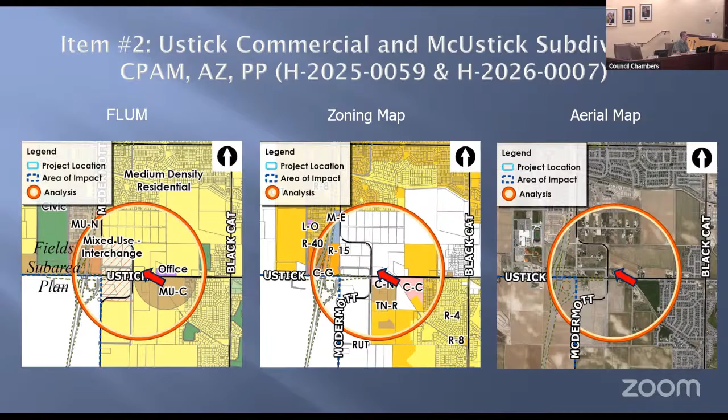So the first application I'll spend some time on is the comp plan amendment. The reason I want to spend the most time on this is, as you probably are aware, staff is recommending denial of this particular application. The applicant is proposing to change these 4 acres from MDR to commercial.

As part of the application submittal, the applicant did provide written justification as to why they felt commercial made more sense on this particular site. I'll get into their justification in a bit in my presentation.

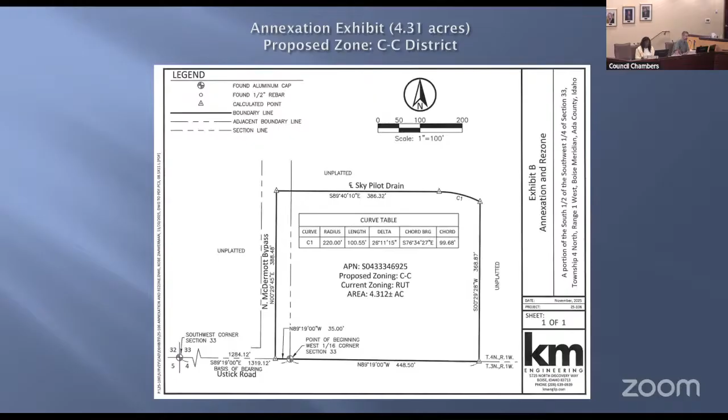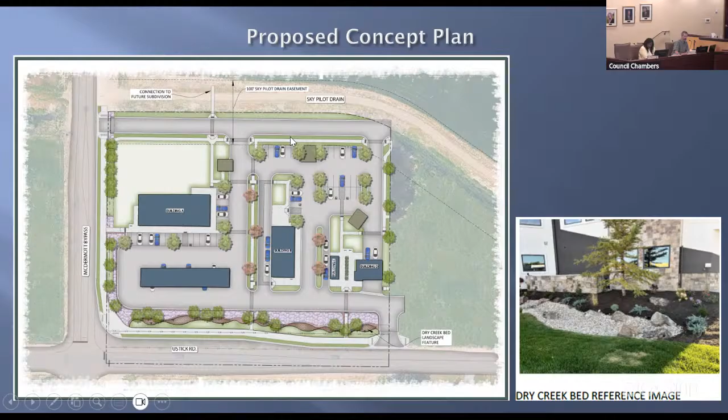There is also potential for a stub street to the property to the north. The applicant has provided a pedestrian connection, but given the width of the Sky Pilot drain, staff is unclear how that will provide adequate transition to the adjacent subdivision. We don't believe these uses are compatible with the adjacent subdivision or future development.

Based on ACHD and city policies, ACHD does not support the right-in, right-out access, nor does our city policy allow for that access point. ACHD did state they are open to the McDermott Bypass access since it's a lesser classified roadway than Ustick. This will potentially be designated a future collector, while Ustick is an arterial. So if and when ACHD takes jurisdiction and the applicant is successful with their project, they would have to work with ACHD in the future, as ITD has currently said no to that access.

With development of the property, the applicant will be required to put in landscape buffers along both Ustick and McDermott Bypass roadway.

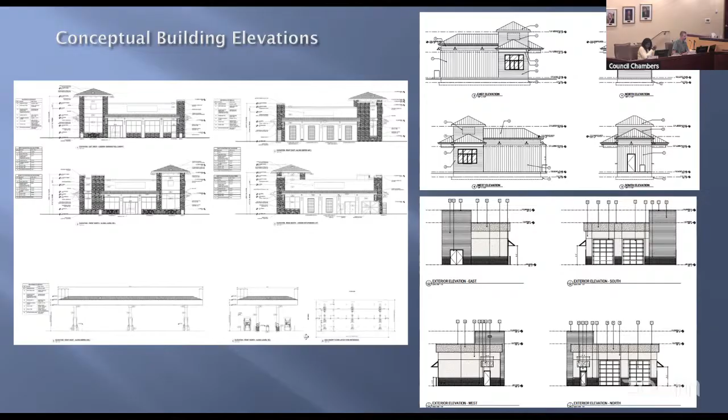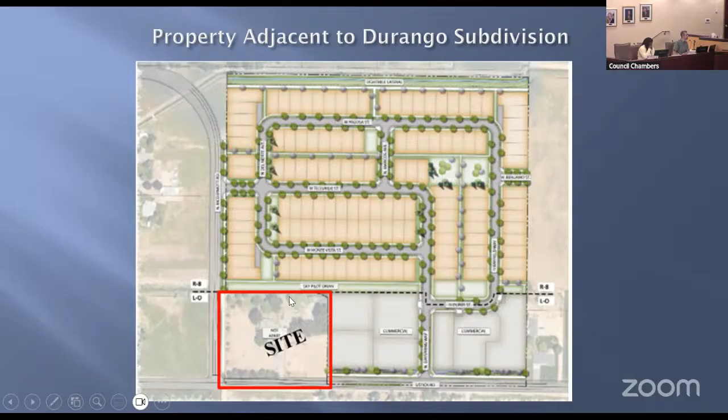Staff has not received any written testimony on this particular item. Staff is recommending denial of the comprehensive plan map amendment, which subsequently denies the annexation and the pre-plat. With that, I'll conclude my presentation and stand for any questions.

Does the commission have any questions for staff? Commissioner Gelsomino: Has ITD provided any written comments on the application yet? Staff: They did after the print date, and their comments are in the record. They said no access to the bypass, but they had no concerns with the development.

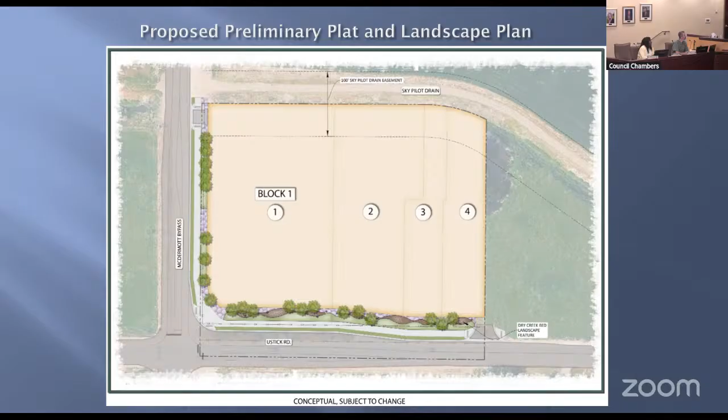Would the applicant like to come forward, and please state your name and address for the record? My name's Ethan Mansfield with Hawkins Companies, 855 West Broad Street, Boise, Idaho, 83702.

I just want to thank Bill for presenting the nuts and bolts of the application. It certainly is auto-centric, and I'm going to spend a lot of my time tonight explaining a bit about why that is.

As you know, here is the project. It's located on the northeast corner of McDermott Bypass and Ustick Road, about a third of a mile east of the State Highway 16 on-ramp. Between McDermott Bypass and the on-ramp is a mixed-use interchange, and that's the area the city has decided to reserve for non-intense uses. To be clear, that area is on the left side, or west side, of the McDermott Bypass, not on the right side.

So here is our conceptual plan. I want to be clear, we've had interest from multiple users, more than this site could support. So what this concept plan shows is the most likely scenario for the development of this site, and I'll talk about why we chose these users momentarily.

A couple notes: we do plan to add a landscape buffer per UDC 11-3B-9C along the south side of the drive aisle, or north side of the development. We coordinated with Nampa Meridian Irrigation District — this is how the easement has to look. They're okay with the road in there, but they will not allow vegetation other than grass, no trees. So we thought this would be a good solution, allowing them an access road and access to our development, and we'll put the buffer on the south side outside of the easement so we can actually plant trees.

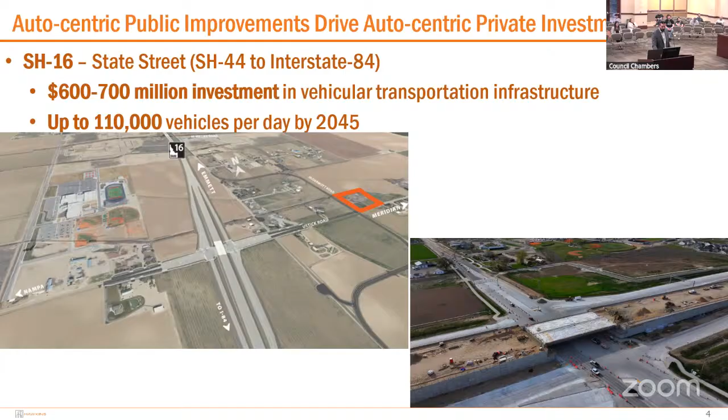In addition, we have Ustick Road. ACHD is widening Ustick to 5 lanes, 2 in either direction with a single turn lane in the middle. That's a $10 million investment, again, in vehicular transportation infrastructure. The stated goal of these improvements is to move cars quickly from one place to another, to make commuting better, to make car driving a better experience. This is expected to serve 35,000 vehicles per day.

So I think about it like this. If I'm investing $600 million in an office park, I'm anticipating office uses. If I'm investing $700 million in a vehicular transportation corridor, it would make sense to anticipate vehicular uses along this corridor, because cars require gas, they require lubrication, they require cleaning, and the people driving them require coffee.

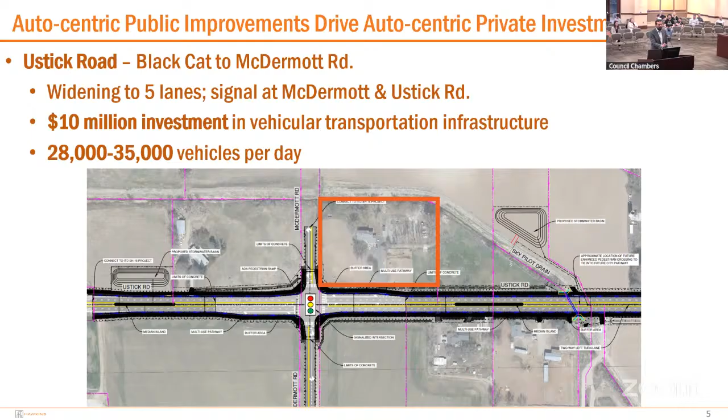And so if it were not for a $600 or $700 million public investment in this vehicular transportation infrastructure, this area probably wouldn't be under consideration for development at all. It probably wouldn't even be for sale. You'll hear from the person who's selling it about why they're choosing to put it up for sale and move. So, as I said, it should come as no surprise, based on our priorities as a community and where we're investing our money, that this would develop with autocentric uses.

In addition, neither ACHD nor ITD requested a traffic study for this project. It was requested solely by the city of Meridian, and ACHD approved the project with standard conditions. Hawkins is planning to pay for the 10-foot detached pathway frontage improvements along Ustick and along McDermott, and it's going to be constructed in concert with the Ustick Road widening. So we will pay ACHD, we'll pay the road trust deposit. ACHD says no mitigation is required and no alternative mitigation is required. Again, it seems like we are all anticipating this sort of use along this corridor based on our investment priorities.

So next, I'd like to spend a little bit of time talking about auto-oriented uses and their impact on the surrounding road network. The staff report suggests, and I think there's a widespread assumption, that autocentric uses mean more congestion, more trips, increased vehicle miles traveled, more negative impact on the community. And this simply isn't true.

If you look at the data, you can see that 65%, that's 2/3 of customers visiting this site based on our traffic analysis, are pass-by trips. What that means is they're already driving past the site, they're already on the roadway, they're already in the area, and they're turning right into our development. Only 1/3 of the trips are actually new trips added to the network as a result of this development on this corner. So it's important to consider that while you might have 2,950 trips coming in and out of the driveways, 1,900 of those were already going to be on the roadway anyway.

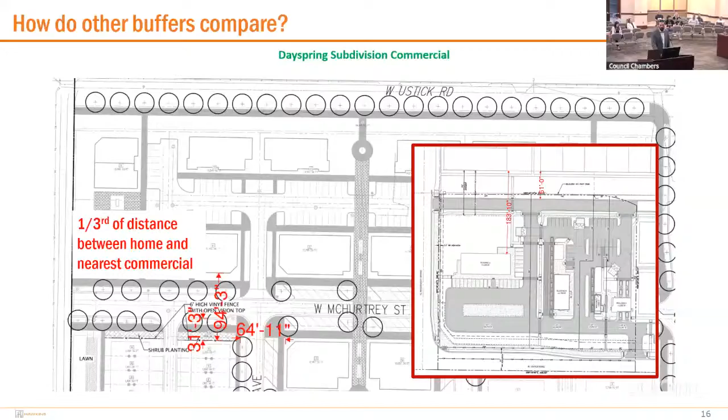You'll see momentarily that this is reasonably common—actually much farther than the distances provided in many other residential developments as a buffer. Here's Dayspring: the nearest roadway is 31 feet from the fence, the nearest building is 65 feet from the fence. Here are a few other buffers: 84 feet from car wash to building, 38 feet from coffee to building, 70 feet from building to Walmart, 140 feet from this building but with two drive-through lanes between it, 60 feet from building to gas station, 50 feet, 75 feet. So this is actually a much greater distance than most of these.

So finally, where is the appropriate place to put residential? It's probably not on the corner where you have 35,000 vehicles stacking at a lighted intersection throughout the day and night. It's probably much farther north where you're buffered by commercial uses. You can see the number of vehicles is substantially similar—a couple hundred more when you combine both ours and Durango's, but not more than Dayspring to the south.

So I've done the market analysis. In summary: auto-oriented investment drives auto-oriented uses. The uses we are proposing are less impactful to the roadway network than other commercial uses, and similar in intensity to residential uses. Residential units on Ustick would be far more negatively impacted by noise, light, and odor than where they are currently proposed.

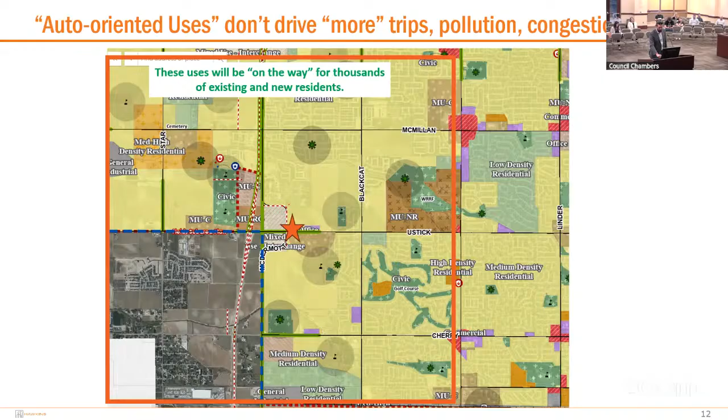I didn't see on the concept plan for the commercial buildings any kind of pedestrian connection to the east. What would that look like if that develops as office right there directly to the east? Is there anticipated to be coordination for movement?

Commissioner Perot, absolutely. So we have a few connections to the east, as well as we've committed to straightening out this connection to the north. It currently has this little jog that looks like this. So I just wanted to mention we're committed to straightening that out to make it an easy pedestrian connection into the neighborhood, to become like a corner store amenity for that neighborhood.

On the east side, we have the main sidewalk that runs south of the drive aisle. We have one shown in the middle here, and one shown south of Building D, as well as the 10-foot pathway along the frontage that's going to be required of all, constructed with the Ustick. So we can absolutely commit, and we have already started. We're still very preliminary in site planning, right, because this is a hearing about use, but we've absolutely committed to planning for connectivity there. We're not going to build a sidewalk into the back of a building.

So to follow on the question about Durango, Bill, remember we do CPAMs twice a year. Is that right? So I think this is our first one this year. Obviously I understand the time value of money and you want to get things done sooner than later, but is there any reason why Durango is getting pushed back? I'll kind of lay my cards on the table.

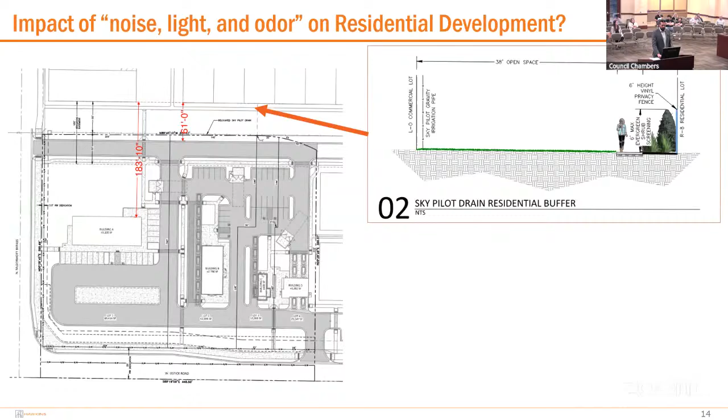As far as waiting to see how the area developed, I'd like to point really quickly to the regional mixed use that Bill was speaking about and talk a little bit about that development's trajectory there. I think it's important.

So the regional mixed use that Bill's referring to exists here. You can see that it is completely bisected by Highway 16, right? I was under the impression that the city has communicated they do not want intense uses immediately adjacent to Highway 16. So I'm a little confused by why the regional mixed use exists over Highway 16.

However, my main point is all of this, with the exception of maybe a 4-acre piece, has developed into residential. So there's 4 acres of commercial. We know the broker quite well, he's actually Bronson's brother. We've been communicating with him and we even looked at purchasing it.

The access is so challenging. It's literally the off-ramp from State Highway 16. So the access is bad. When we talk about where users want to go, we've seen so much interest in this corner, and they've been trying to lease their mixed-use regional corner with bad access for 2 years. So we know we can get leases on this one.

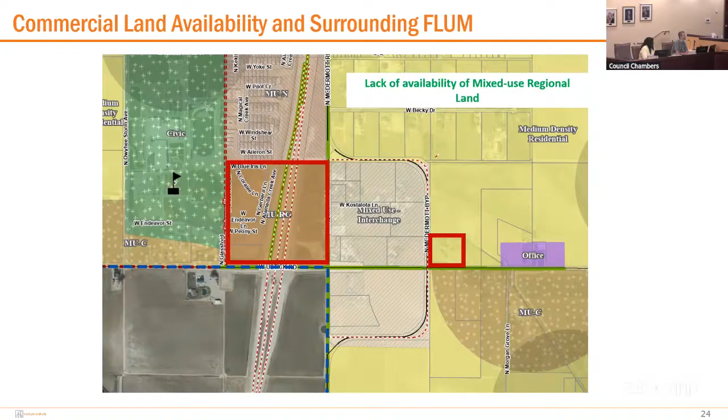So they were gracious enough to pause their application, go back to the drawing board, try to add more office to their development, work with the applicant. Unfortunately, when the applicant had to meet their deadline to get a comp plan amendment in, they were forced to meet that December 15th deadline. And Ethan was very quickly reminded of that. Your pre-app said we wanted an annexation and a pre-app to go concurrent.

And at that time, his property wasn't contiguous to city limits. He could not apply for annexation. So staff extended some grace to the applicant on this application, and that agreement got recorded. And lo and behold, Dayspring to the south was annexed in February, mid-February. At that time, Durango wasn't quite deemed complete yet either. So again, there's always a timing component and things required.

Unfortunately, it got close, but we didn't get close enough. We were 3 weeks apart. And that's why we scheduled the special meeting for May 28th, because there may be an opportunity to get Durango caught up to this applicant at City Council.

But at this point, that's kind of what's happened between the 2 applications and why they aren't coinciding or going together. And that's why you have all of the comp plan amendments grouped up tonight, because we try to take all those together at one time. So we're trying to meet internal policy, also meet application requirements and deadlines, and also make sure properties are contiguous. There's a lot of moving parts here to try to make that all work.

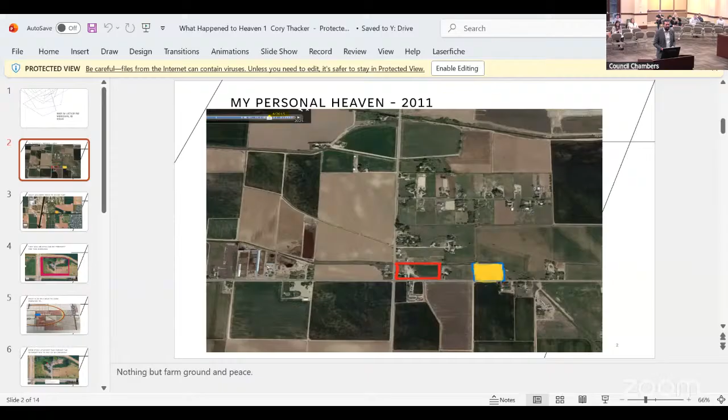Thank you, Commissioner Smith, commissioners. I guess just a couple points. As you can see, there's clearly the investment in vehicular travel impacts those on the corridor. And I think it makes sense to create uses there that capture some of the trips generated by places further afield. It makes sense to not be a destination, but a service pass-by.

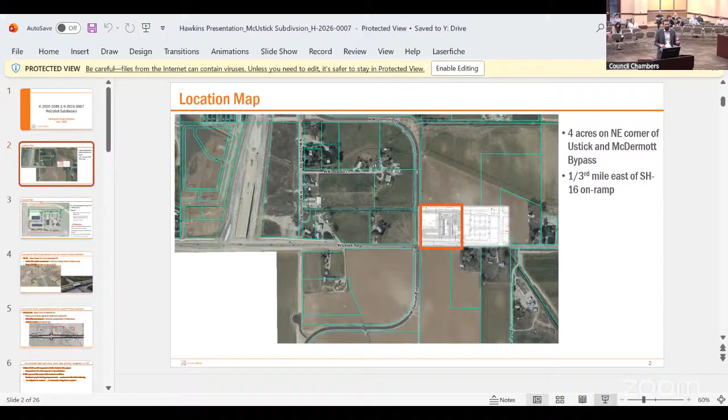So maximizing pass-by trips is probably one of the best things you can do for this corner, as opposed to either creating more houses immediately adjacent to some of the concerns these folks were mentioning, or creating a destination commercial where people are trying to get to it. I think there's a very distinct difference between those two types of commercial uses.

And as you saw by the traffic study, these are very different things. This is much more of a pass-by use. And I think that's truly what the city actually wants here, based on the community's investment decisions in these major roadways, not the city's investment decisions.

I'd also like to touch a bit more on the coordination we've done with Durango, since Bill mentioned it. I want to stress that we have really been coordinating very intensely with Durango. We share the same engineer, KM Engineering, and Stephanie's here—not representing anybody from Durango or us tonight, but she's with KM and we love working with them.

So we have the same engineer. We're coordinating to pipe the canal. We've already spoken with ACHD extensively about the routing of the canal. Nampa Meridian wants us to pipe the canal. The canal serves as a nice buffer between the residential uses and the commercial uses. There's just a lot of things that make sense here. From a timing perspective, I think this truly is the right time.

The roadway will be torn up while we're constructing utilities. We don't have to go back and cut into the 5-year pavement moratorium, which would happen if this waited 3 years—then you'd cut into a brand new roadway and make a giant cut. Not only is it more expensive, it's less efficient for the community because you have to shut down roads. So truly, this is the time when this area is initially developing to develop with it. We're really looking forward to that opportunity, and we'd appreciate it. We can commit to providing something the community can be really proud of.

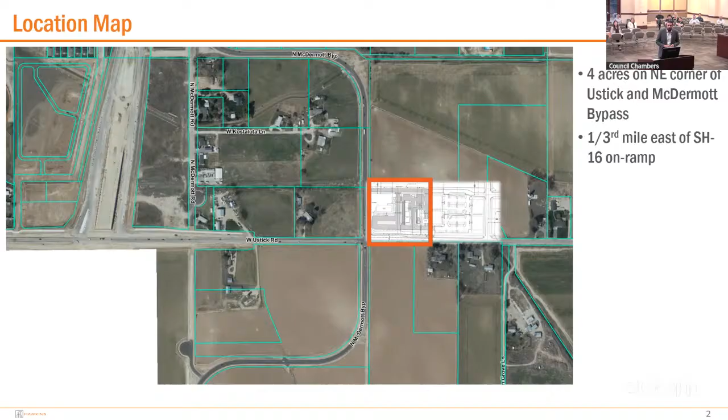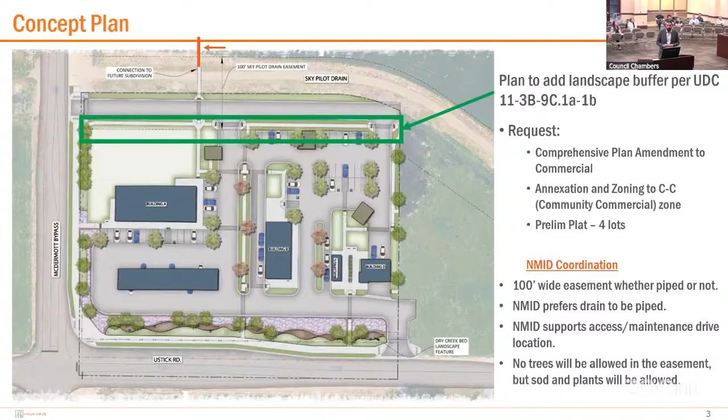So can you walk me through the buffering again there on the north side? If I remember correctly, the intention is to have all that buffering on your property, and obviously nothing can be added to that easement. So can you talk me through what you expect that to look like? Is there going to be any actual standing structure, or is it just a fence, a wall, something, or is it just space or distance?

I will start, Commissioner Perot, this is a great question. I'll start from the north side where the fence is at the neighbor's house and then walk southward so we can get a full cross section. I think that would be helpful.

So on the north side, each of these homes will have fences associated with them. You can see the residential buffer in this picture. The fence is on the edge of the canal easement. Within that, they can't build trees, but they have gotten permission to plant shrubs with a max height of 6 feet, as well as additional shrubbery in the 7-foot planting bed. Then there will be a 5-foot pathway about 7 feet from the fence, and then 38 feet of open space to the property boundary.

Then there will be an additional—38 plus 5 plus 7, so 61 minus 38 plus 5 plus 7—between the property boundary and our street. Then there will be a landscape buffer, but no trees, a sidewalk, and that's where we can then plant trees. If a wall or fence is deemed appropriate, we can construct that. What we don't want to do is give the feeling of a weird little fenced corridor with nothing in it. We can still build the fence, but we didn't want to create a road with fences on either side of it—though we can, if that's of interest.

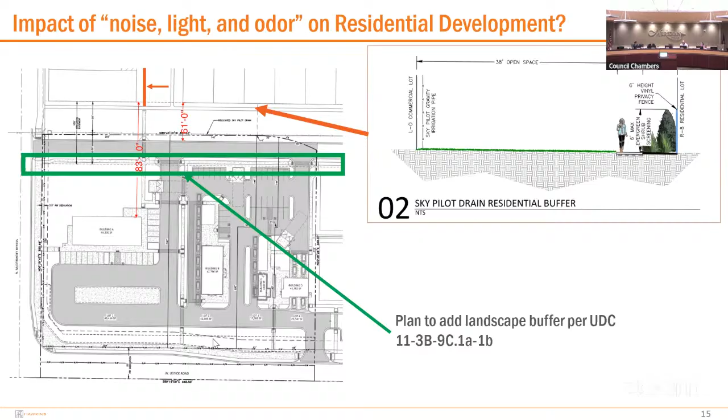Mr. Vice Chair, Commissioner Stoll? I move to continue file numbers H-2025-0059 and H-2026-0007 to the hearing date of May 28th for the following—do I have to give reasons?

No, that's fine. Seconded. Moved and seconded. All those in favor say aye. Any opposed? All right, the motion carries.

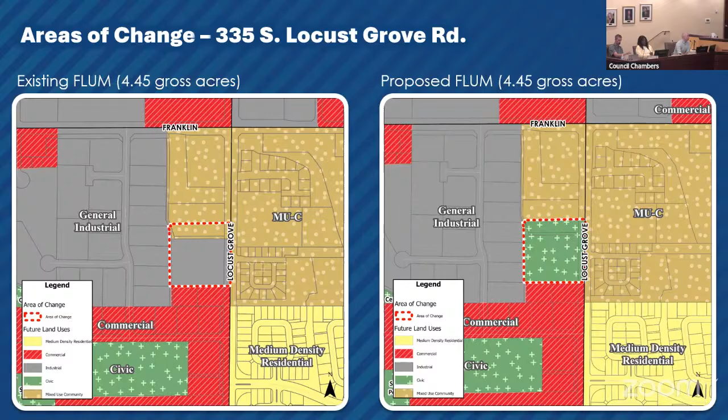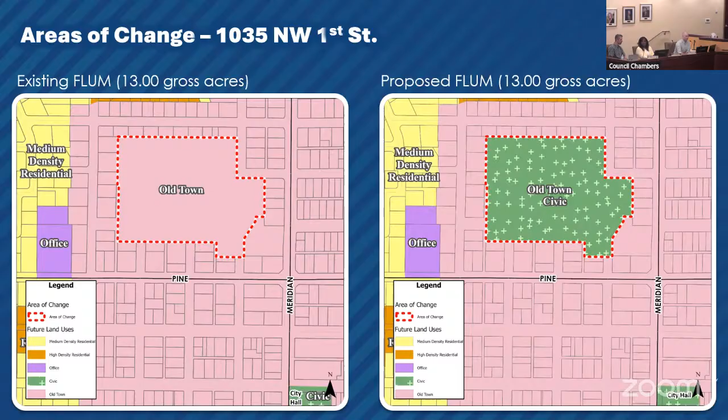The next location is at Meridian Elementary here in Old Town, from the existing designation of Old Town to a designation of civic—it would just be civic, not Old Town civic, for clarification. Again, this is to reflect the existing land use here.

Next, we have the site at 1752 West American Fork Drive, a West Ada School District property, with two designations—high density residential and medium high density residential—changing to civic as well. This area is 2.41 acres of the total parcel area of 11.51 acres.

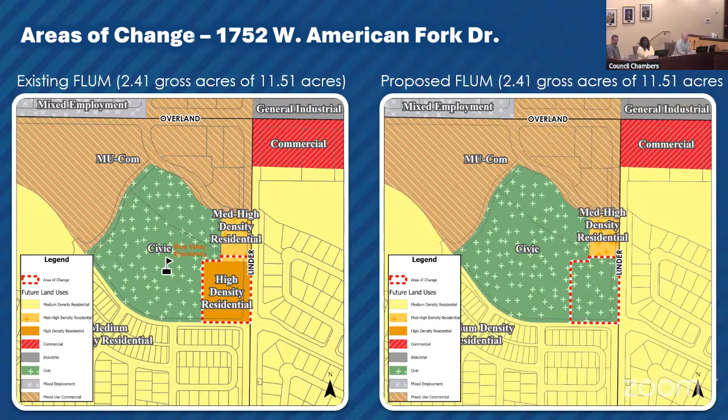We're getting into the City of Meridian portions of this application. Bear Creek Park, you'll notice the square reflecting the park here. That square encompasses a few private residential parcels on the northern portion, and where the corner moves to the northeast, those sections would be redesignated from civic to low density residential to match the full property. You can't see it well at this scale since it's covered by the area of change boundary.

The little pathways connecting to the residential neighborhood are all owned by the City of Meridian as well, with low density residential designations, and designated in the civic. So essentially this is a cleanup to reflect what's there currently.

The next application is Fire Station number 8 and the North Meridian Police Station off of Owyhee Storm. This site is medium density residential, as well as a parcel owned by the HOA for their landscaping. This would redesignate the site from medium density residential to civic, again reflecting what's there currently.

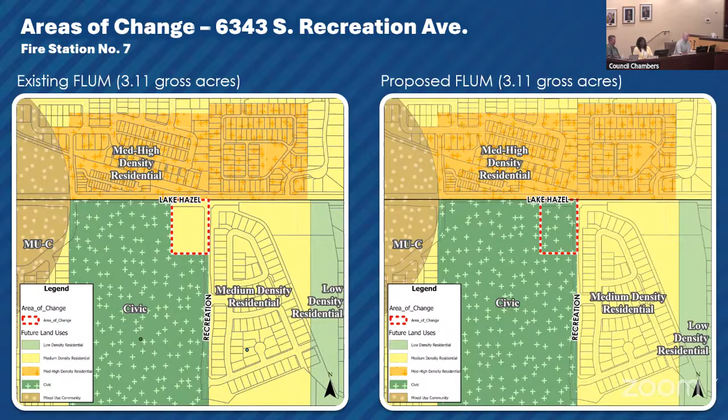All notification requirements for this application have been met, being citywide, and a courtesy notice has been sent to property owners whose parcels were included in the application for the cleanup as well. No public comments have been received on this application, and we did receive 4 agency comments, which are included in the staff report packet.

Staff recommends approval of the comprehensive plan future land use map amendment, and is happy to answer any questions the commission may have.

Since the city is the applicant here, is there anyone else from the city that would like to make comments before we open anything else? We're good.

Madam Clerk, do we have anybody signed up for any public testimony? Thank you, Madam Chair. No one has signed up. Commissioners, do we have any questions for staff before we close the public hearing?

Okay, I will take a motion to close the public hearing. Move to close the public hearing. Second. It's been moved and seconded to close the public hearing on H 2026-0006, Citywide Comprehensive Plan Map Amendments. All those in favor say aye. Aye. Any opposed? Motion carries.

This seems pretty straightforward and logical since it is the time that we are reviewing the comprehensive plan and any changes. I don't see anything that's out of line, especially considering a lot of these are administrative adjustments of things that needed to be done. Commissioners, do you have any other comments in regard to this?

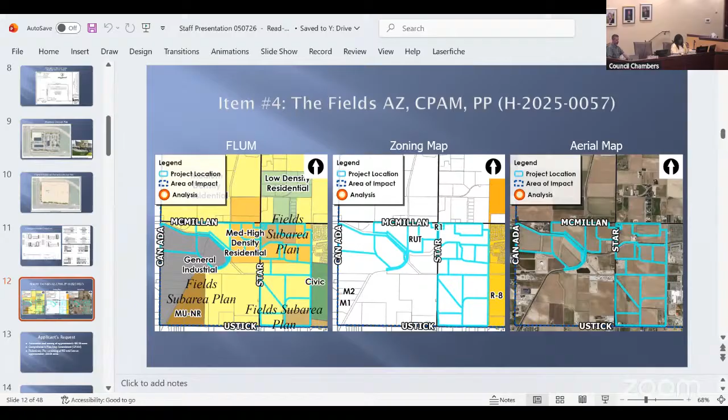Good evening, Commission. Linda Ritter. So tonight we are talking about the Fields project. It is an application for annexation, a comprehensive plan map amendment, and a preliminary plat. This site consists of 480.26 acres of land. It's currently zoned RUT, and it's located south of McMillan and north of Ustick, between Can-Ada Road and Owyhee Storm Avenue.

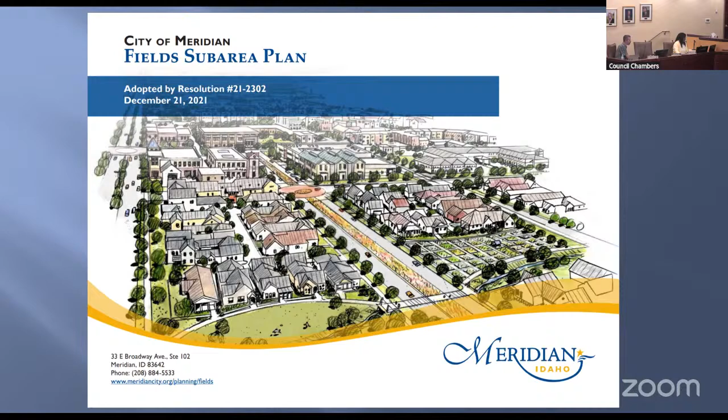So just to give a little bit of history on this: this property is located within the Fields sub-area plan, which is bound by Ustick Road, McDermott Road, Chinden Boulevard, and Can-Ada Road. The Fields sub-area plan was adopted on December 21st, 2021 by resolution number 21-2302.

The Fields sub-area encompasses approximately 4 square miles in the northwest portion of Meridian and represents one of the city's final major growth areas. The plan provides a framework to guide development consistent with the vision of the Meridian Comprehensive Plan by supporting expansion of the employment base by integrating high-quality neighborhoods, parks, pathways, and schools.

This area is adjacent to the City of Star's impact area to the north and the City of Nampa's impact area to the south and the west.

The vision for the Fields sub-area is to create a series of interconnected community-oriented neighborhoods organized around a central mixed-use activity center. The center is planned at the intersection of Star Road and McMillan Road, and is envisioned as a pedestrian-oriented main street.

The center is envisioned with a central green, integrating civic and commercial uses and direct connections to the 5 Mile Creek pathway.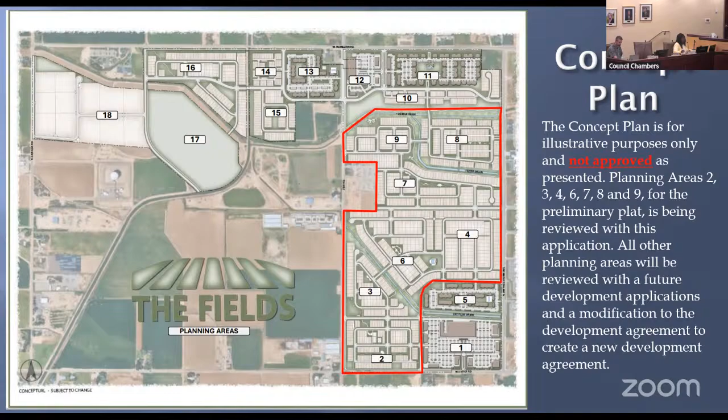The applicant also created design guidelines to go with their application for development within the annexation area. So all development within that annexation area, within the Fields area, will be required to adhere to these design guidelines, as well as the Fields sub-area plan, the city's UDC code, and any ASM standards we have for design review.

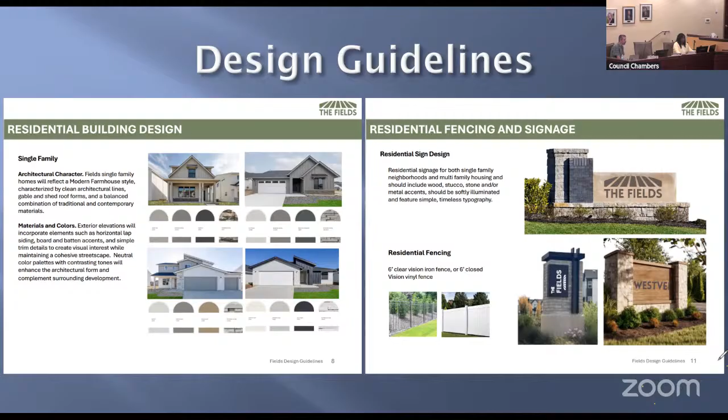Sorry, something clicked on here—I wasn't supposed to. So you had design guidelines for commercial, industrial, residential, signage, and pathways.

We did not include the residential portion for this—this is just kind of a snapshot of what is happening there. Again, a lot of what was proposed within this mixed use area currently does not adhere to the Fields sub-area plan, so some changes will need to be made prior to them coming in to submit for their development.

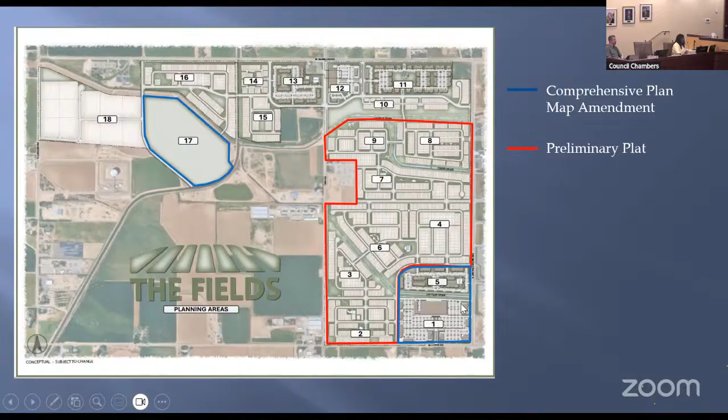Again, I just wanted to call out the things we're looking at tonight. We are looking at the annexation, comp plan map amendment—these two blue areas are for the comp plan map amendments—and then the preliminary plat.

A traffic impact study was done over this whole annexation area. It evaluated development impacts on the study area intersections and roadways for the build-out year 2040, and provided an evaluation of what improvements may be needed beyond those planned in ACHD's capital improvement plan.

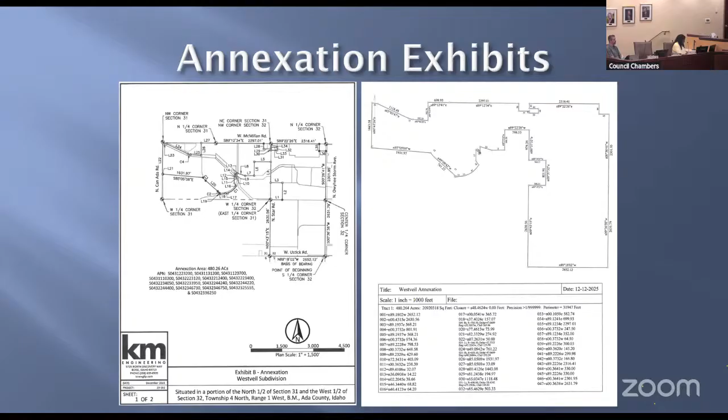Okay, so let's talk about annexation. There's 480.26 acres going from RUT in the county to these zoning districts that they are looking at.

We have 42.87 acres that they want to bring in for community business, which is the CC zone. Neighborhood business, which is the CN zone, that's 45.63 acres. Medium density residential, which is R8, they want 194.44 acres. Medium high density residential, which is R15, they want 100.63 acres. And traditional neighborhood residential, which is the TNR, 45.05 acres, and light industrial, 51.64 acres.

This is the annexation, and these are the zoning districts that they are requesting. So staff did look at their annexation and what they are requesting and had no opposition to what they are proposing.

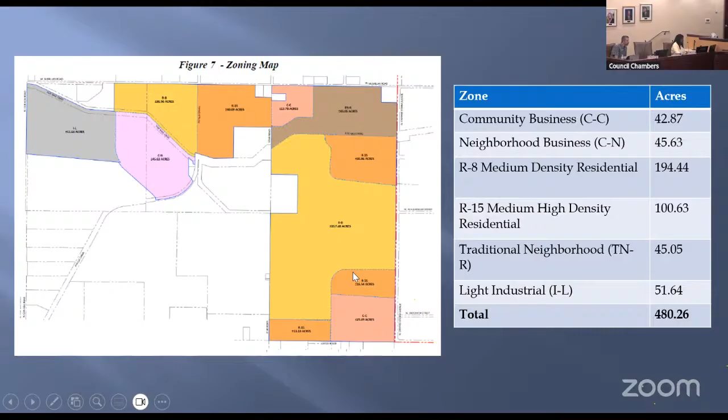So now we'll look at the comprehensive plan map amendment that they are proposing. They are proposing this for the area in the southeast corner of their annexation area, adjacent to Owyhee Storm Avenue and Ustick Road. Currently, it's medium density residential and mixed use community. They would like to change it to high density residential and commercial. They are proposing the Owyhee Center in this location.

In this location, they want to do multifamily. This area is bisected by, I think, a Sky Pilot drain that goes through there. As it is currently, they could build residential there and would not have to have it interact with the mixed-use community below it because they are in two separate zones.

They have provided in their concept plan, but again there's still work to do, where there are connections from the residential to get to the commercial area. So even though there is not a crossing on the Sky Pilot drain, they have avenues that come along the roadway, sidewalks, pathways that come along the roadway that connect into this area.

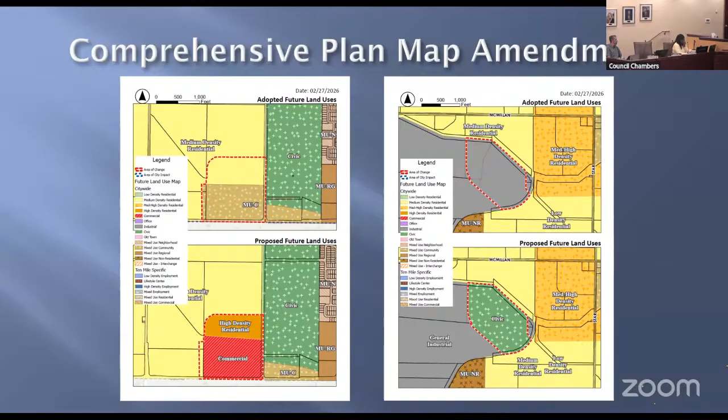The plat includes minimum lot sizes of 2,000 to 4,000 square feet. The minimum lot size they are proposing is 3,984 square feet. The maximum lot size is 10,610 square feet, and the average lot size is 5,725 square feet.

They are proposing 14 common driveways with this subdivision. They provided common driveway exhibits that demonstrated there were no more than 3 units served from a common driveway.

So based on what they are proposing here, all the lots within this subdivision are currently vacant, except for the property located in the southwest portion. It has existing structures on it that will need to be removed and meet the current standards for the city. They are taking access to this preliminary plat.

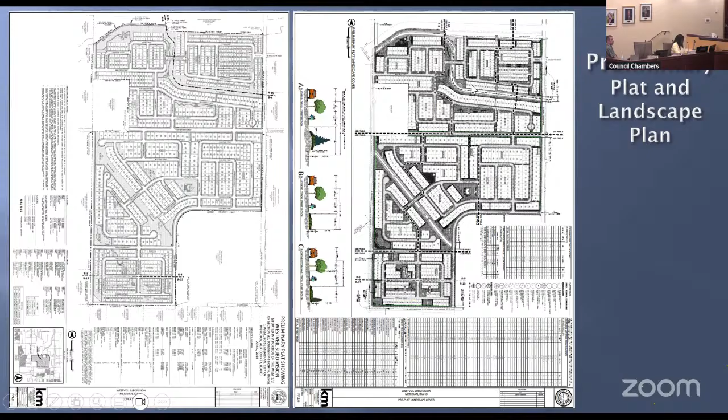So these are the street layouts they are proposing for Star Road, Ustick, and Owyhee Storm. Owyhee Storm will be widened to 3 lanes. Ustick Road currently is in the process of being widened to 5 lanes. Currently, it runs at a level of service of F, but once the widening has been completed, it will perform at an acceptable level for ACHD. And then Star Road, they are required to provide additional right-of-way along Star Road for future widening.

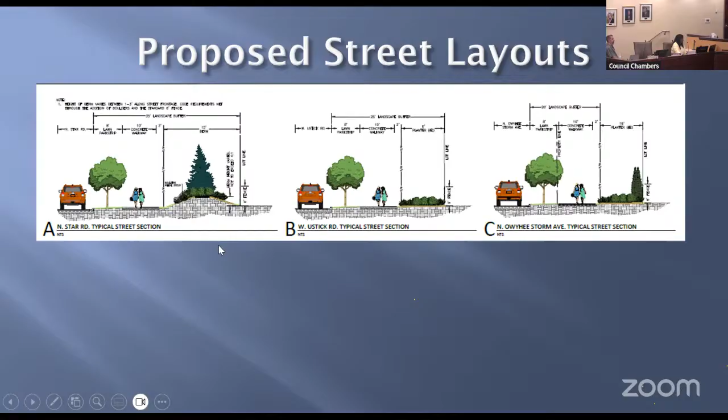And these are just the streets within the subdivision as far as how they will be developed. Most of the streets will have a 5-foot sidewalk and 8-foot planter landscape behind them. Several of the streets will have the 10-foot multi-use pathway along them with the planter behind them. And most of they're proposing lots of parkways along this development.

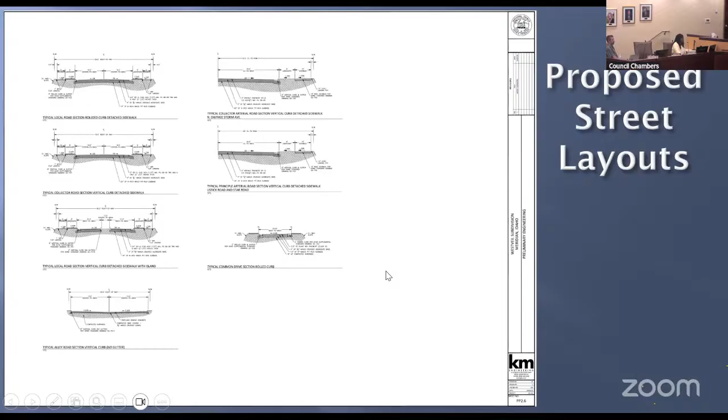There are several streets that extend the 750 block face length. But in reviewing it, it says that the streets cannot be longer than 1,000 feet in length. You have several roadways, as I have listed here, that don't quite meet the 1,000 feet, but they are past the 750. Staff has no objection to these proposed streets being this length.

Then you have several that exceed the 1,000 feet, but they are not supposed to go past 1,200 without council waiver. So these don't quite meet that. So staff has no objection to these roads. They are working with ACHD to do some traffic calming along these streets so that they don't become a raceway within the neighborhood. But there is one street, West Achievement, that does exceed that, and they are requesting a council waiver for it.

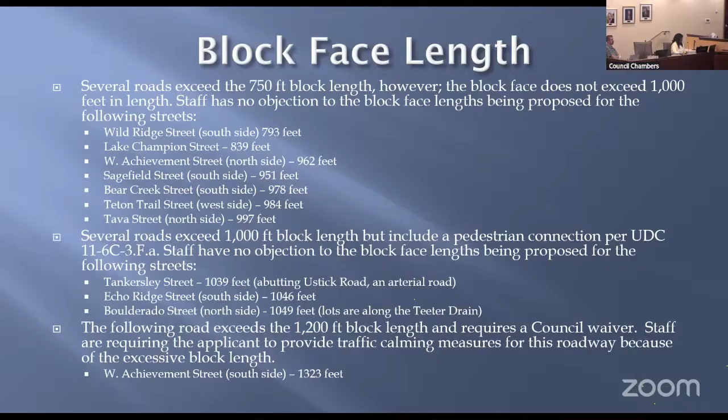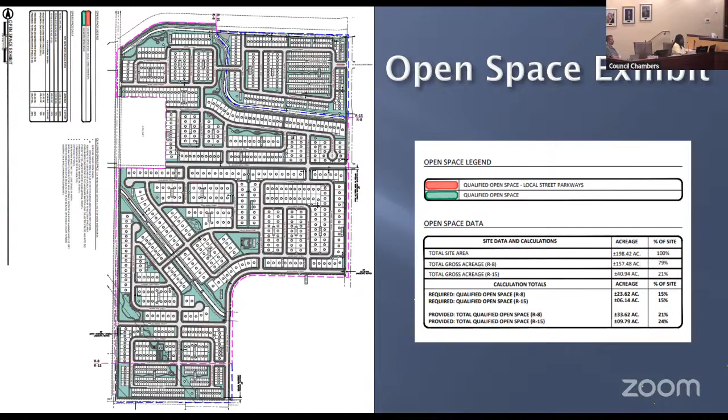They exceed their open space requirements. They are well past the 15% that is required.

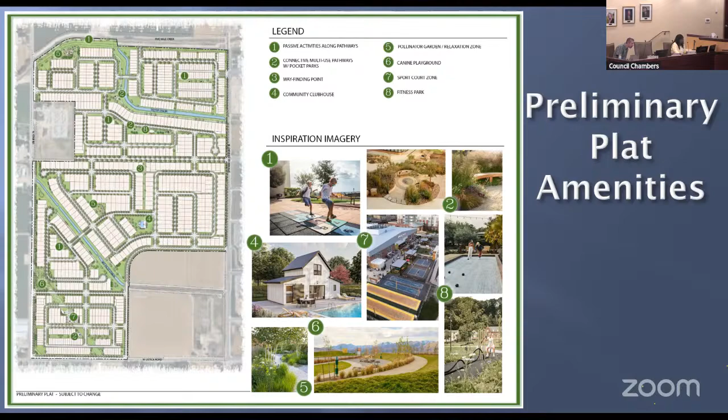As you can see, there's lots of interconnectivity for people to walk through this area.

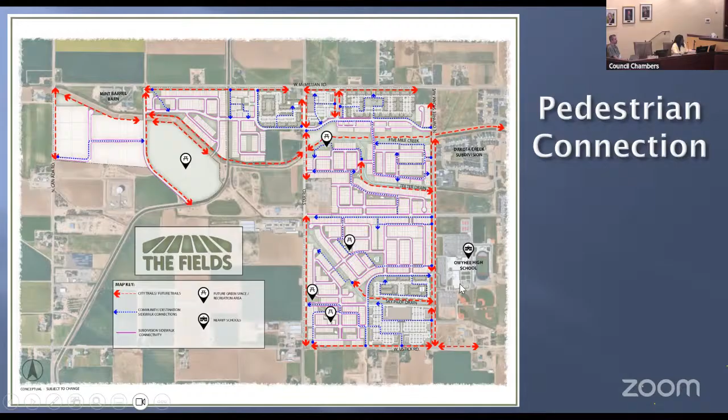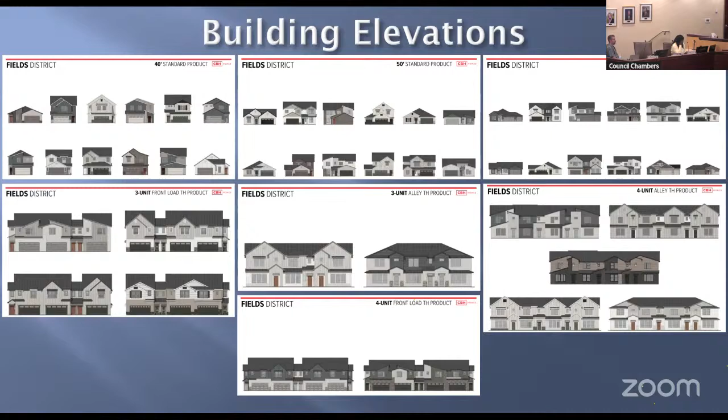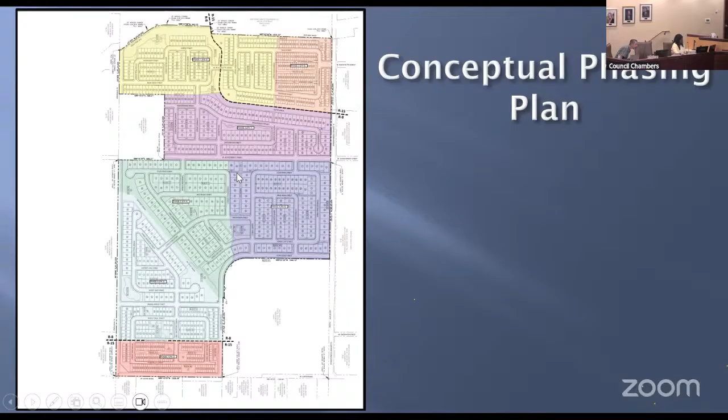So we did not receive anything from the school district, but the city put together this table based on information from the school district's site.

So it was generated. Looking at this, you can see that the elementary school is past its program capacity. The middle school is over capacity, and so is the high school, Owyhee High School.

We hope to have something from the school district before we go to city council. But these are the numbers.

And then we did add in a section. Even though we didn't get a number of units in the other areas that will have multifamily in them, we did put together something estimating low and high dwelling units outside of preliminary plat. You can see that the maximum count is about 645 multifamily units.

So, 1,210 single family units and 645 multifamily units, which would result in approximately 722 school age children of all grade levels. Even though we didn't have anything, we used our estimates based on dwelling units per acre to come up with these numbers.

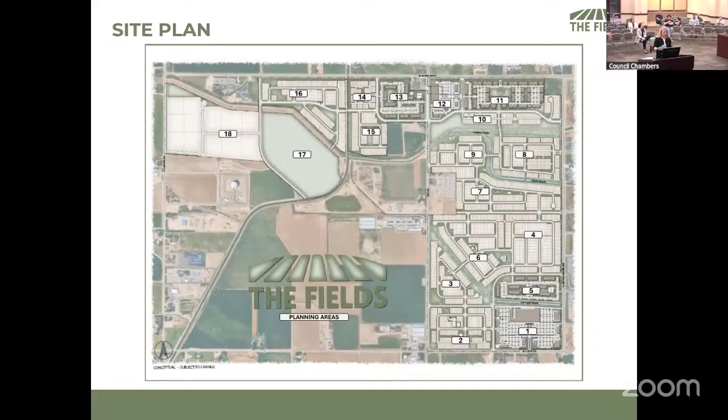A very important part that staff mentioned, and I want to stress again, is that a development agreement modification will be required for the majority of this project at future dates. That gives the city, this body, the city council, and staff certainty that you will be able to approve exactly what gets developed. The build out for this will be long, so it makes sense to say, in foresight, this is probably going to need a development agreement in the future anyway, and we agree with that. We want to have that certainty there that you will get another chance to look at this and approve exactly what is built.

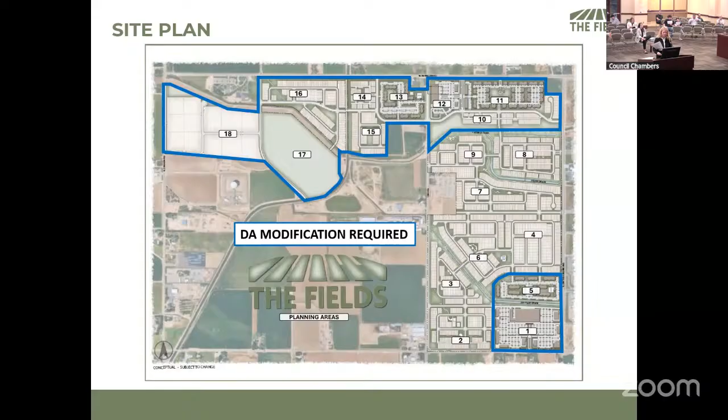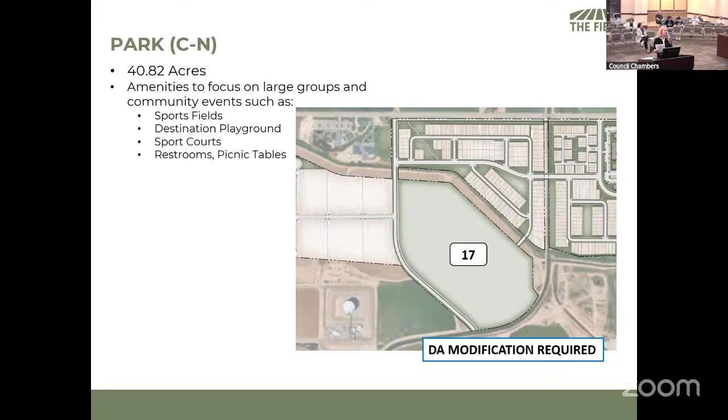Moving east is the park. We were excited to donate this land—I think the appraised value came to about $3.6 million of land donation to the city for this park. It's large enough to accommodate a lot of community events. While the amenities aren't planned yet, they envision sports fields, destination playgrounds, sports courts, restrooms, and connected pathways, including a pedestrian pathway to allow people to bike or walk to the park.

Moving further east, PA 12 is the McMillan Center that staff touched on earlier. This is an important area of the Fields sub-area plan and is envisioned to be a kind of mini Main Street for the area.

And we're excited to do that. In the meantime, staff has requested that moving forward we don't show any drive-throughs. While our design guidelines provide information on how to design drive-throughs that still create a pedestrian feel, we acknowledge and agree with staff's condition that we will not have any drive-throughs along this Main Street area, going north, south, east, or west.

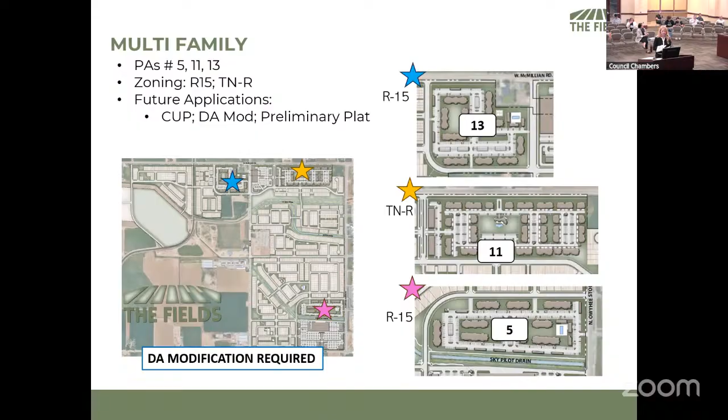We've provided design guidelines for these multifamily developments along with pools and amenities, and they've been sited in areas near transportation corridors and pathways, and will be integrated into the commercial throughout the rest of the project.

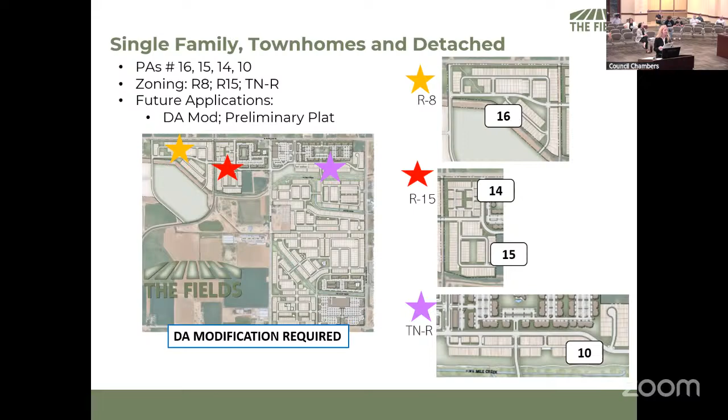The last part included in the annexation and part of the conceptual planning are the single family portions not yet platted—PA 16, 15, 14, and 10. These areas will be platted in the future with a development agreement modification. They will include detached single family homes and townhomes, with densities consistent with the specific area plan, developed subject to the proposed design standards and with important pedestrian pathways and connectivity throughout the area.

Now moving to the next portion of our application, the comp plan amendment. As discussed earlier, the main reason behind the comprehensive plan map amendment is that we wanted a larger commercial space in this Ustick-Owyhee Center. We think commercial is needed here and would be supported here. New commercial in this area will be important for internal trip capture.

This allows people to access some of the drive-throughs that aren't really permitted anywhere else in the Fields area without getting on the highway or without getting on Chinden.

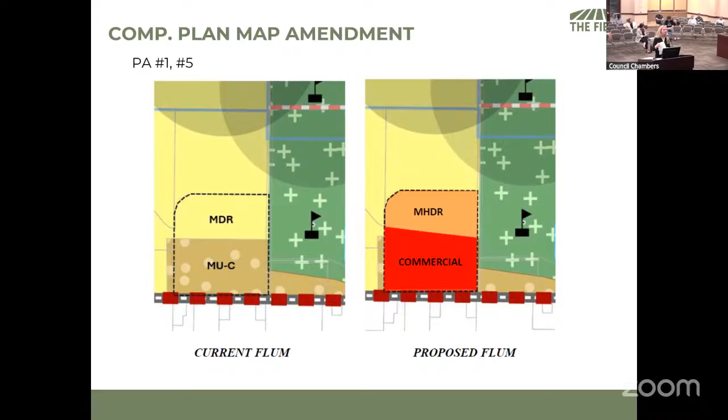So it's really important for internal trip capture for the high school. And again, we think that this area really lends itself to commercial. I do want to note that our application requested that the MDR be changed to MHDR. I believe staff said high density residential, but we're requesting medium high density residential, to still integrate some of the higher density residential next to the commercial, as was originally intended with the mixed use concept.

The second comprehensive plan area, as staff mentioned, is the industrial area that we are requesting be redesignated to civic, to support the park.

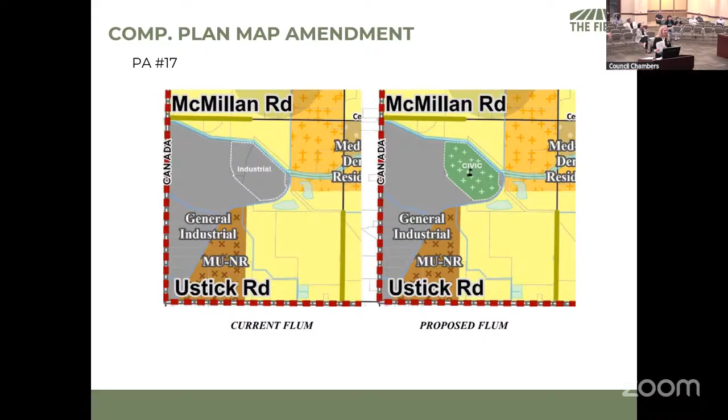Now moving on to the third application, the Westville preliminary plat, which consists of 200 acres, zoning of R8 and R15, with a gross density of 4.49 dwelling units to the acre. It consists of 899 homes in total, with 602 single-family detached and 297 townhomes. The average lot size in the R8 is 5,741, and the average lot size in the R15 is 2,400.

This project will include roadway improvements, including expanding the pavement along Star Road with pedestrian facilities, turn lanes, as well as widening Owyhee Road to a 3-lane road, installing a pedestrian crossing near Owyhee High School, and constructing the new east-west collector through the middle of the site, which will also help reduce traffic off of McMillan.

We are excited to be providing 44 acres of open space within this plat, which constitutes 21.81% total open space, significantly above the 15% that's required. Westville will provide an array of desirable amenities, including a pool, clubhouse, and extensive pathway system, amenitized with pet waste stations, pollinator gardens, seating, and outdoor fitness stations.

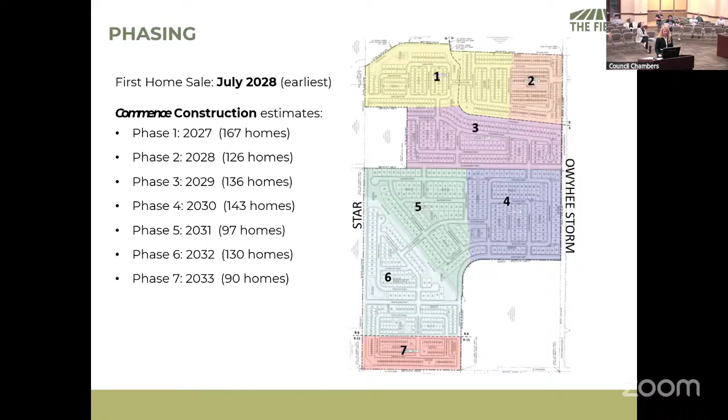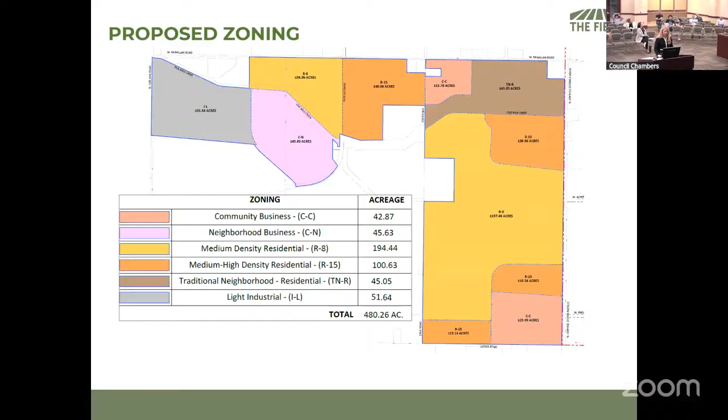Madam Chair, Commissioner Perot, I'm not aware of a Cherry Lane Park. The park we were discussing with staff, as shown on the Fields sub-area plan, was on Star. There was a park along Star. We controlled a small amount of that park, and to get it to a larger size, and actually there's a lot of waterways and kind of funky stuff going through where that park was planned, so to get it on a contiguous piece of ground that's not all cut up—that is the park. I'm not aware of a Cherry Park, but this was the park in our discussions with staff that we talked about.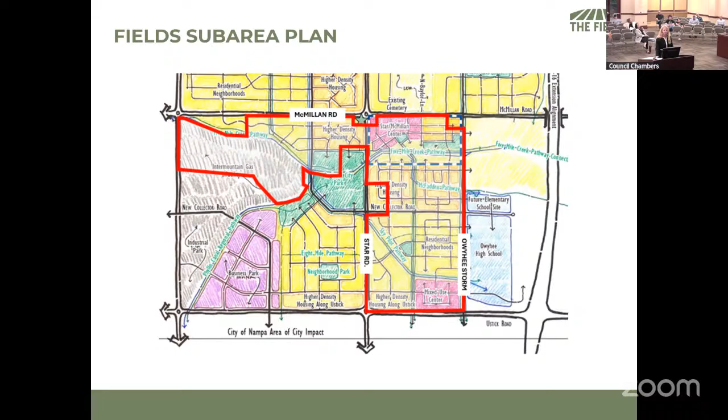Thanks. Madam Chair, Commissioner Smith? As a continuation of that, because of this shifting westward of the park, I'm wondering—I see in the rendering there's a connector to the north across, I think it's 5 Mile Creek. What about connections? Are there any planned pedestrian connections to what eventually, I assume now, will be housing going eastward?

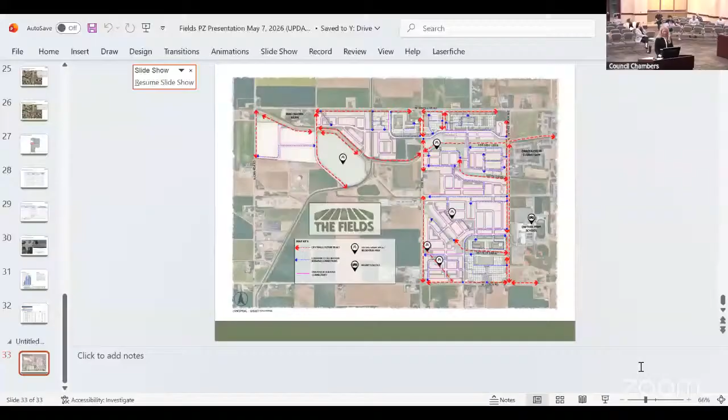Yes, I know I saw there was a pedestrian map, I think in staff's report, I was looking for that in the...

Madam Chair and Commissioner, I think I exited out of this. I wanted to bring up that pathways. I don't know if you can hop on there. Try the arrows. Yes, I'm trying that. There we go.

Madam Chair and Commissioner Smith, there will be a pathway all along connecting the park in multiple areas. It will be hard not to be able to access, along the south portion of subdivisions all the way over to Star Road. That path will then continue along 5 Mile Creek, and also down on the Teeter Drain. So there will be a lot of ways to access the park from pedestrian facilities. Did I answer that question?

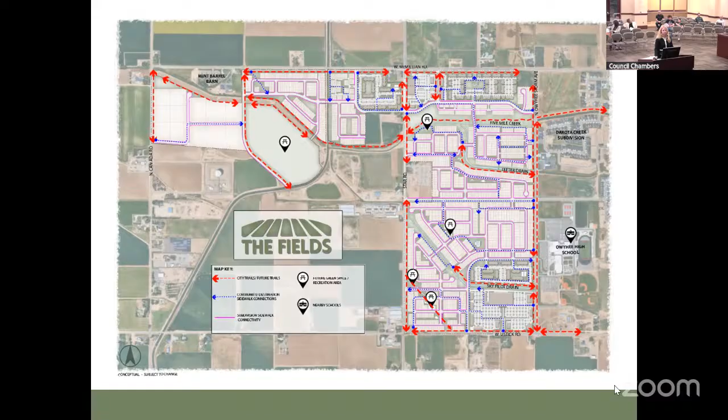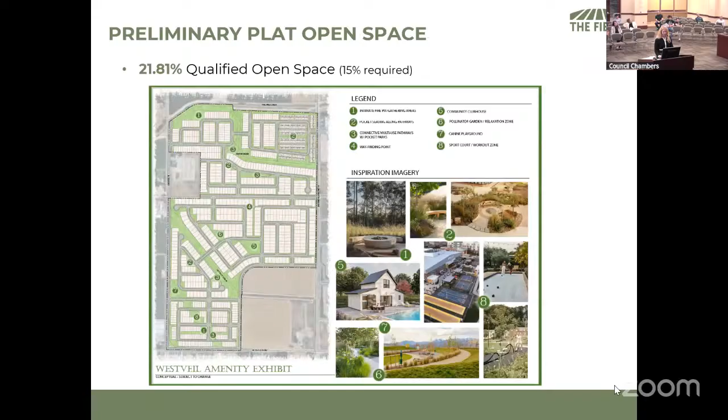Yeah, okay, thank you. I do have one more question, Madam Chair, on a different topic. If anyone on the commission can confirm, mixed use is kind of a pet area of mine. I see a distinction between the sub plan and having two key mixed use areas. One of them, I think, is still listed as mixed use in the actual comp plan or flume. But I'm noticing this bottom right one that borders Owyhee High School, the southeast section - you're trying to change that from mixed use to residential neighbored with commercial. Can you go over the decision process? It seems like mixed use is already dwindling in the city, and it seems like we're maybe excising a little bit of that here. Could you speak to that concern?

Yes, Madam Chair and Commissioner Smith. Our original application left this as mixed use community and just floated the designation. Under code, you can float a designation 50% before you require a comp plan amendment. I think we were within an acre of that float, where we were trying to expand the mixed use community area, showing here's the residential, here's how it connects. We're going to have these wayfinding elements, and there is a Sky Pilot drain in between it, which makes the connection a little bit harder. But focusing on, and it's cut off of this screen, some of the connectivity points - the original request was really just to expand that mixed use commercial.

After we submitted, our original narrative actually had that as mixed use community, it was recommended that we just go ahead and designate them as the two different future land use map designations that they're actually going to develop out as, which would be a medium high density residential, and then a purely commercial product. That was the desire from the beginning, to have a more intensive commercial product on this, not live-work homes here. We think this is a perfect place for commercial.

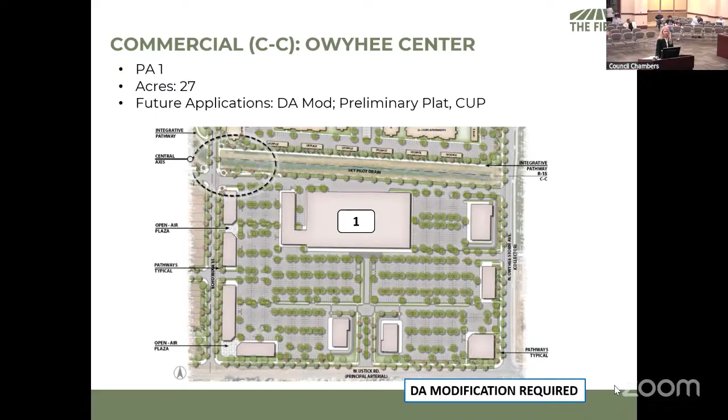Okay, and then that first half - the Star McMillan Center in this sub plan, as it's listed as this northern little red spot - in the flume, it's listed as medium high density residential. But I'm curious about that development as well, if you could expand on that.

Madam Chair and Commissioner Smith, to confirm, this is the area on McMillan that you're discussing? Yes. So we have been able to manage this property since about 2019, I want to say. We've been involved in the specific area planning for this area. At the time, one of the bubble plans that our consultant had was put into the specific area plan, focusing on commercial on the hard corner, which we have here, with our concept showing a neighborhood grocer we think would be perfect in this area - a smaller scale neighborhood grocer, not a big one. And then transitioning into that mini Main Street. Our focus there was to really emulate Bown Crossing. It doesn't need to be huge and really big, but it just needs to be designed right to attract the kind of use that you want.

And also, going back - this really does need a little bit further revision for the DA modification, because the green area in the south is designated on the Fields specific area plan for maybe a type of civic use. We've brought that up in all of our pre-application meetings, that this area is available if the library needs something, and we really haven't had any takers.

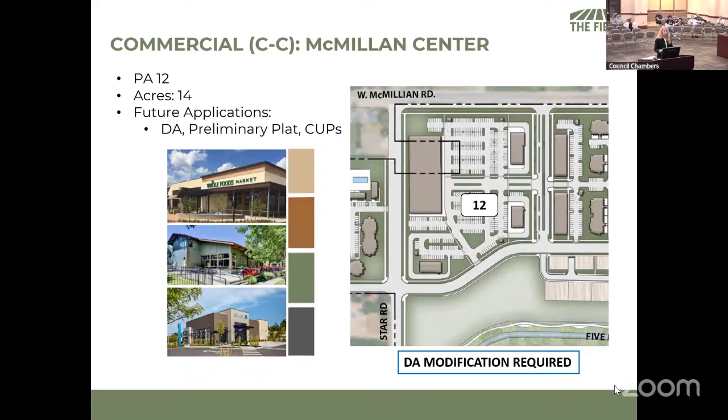From the beginning, almost the same slide was presented 5 years ago showing a Bown Crossing and then transitioning over to the medium high density residential. I think in the specific area plan it shows urban housing is what it says - apartments, urban housing. Some of that got pushed over because the portion of the property on the far northwest corner was sold to Idaho Power for the development of their power station. So we think it really meets the intent of the specific area plan and will be further refined, taking away the drive-throughs, some of those things moving forward.

That's helpful. Thank you. Thanks. Okay, thank you very much. Thank you.

Madam Clerk, do we have anybody signed up to testify? Thank you, Madam Chair. We have Carrie Hovey. She has a presentation. She's also indicated that she's representing an HOA. Carrie's not here. Okay, all right, thank you.

The next person is Eric Small. All right.

Send you a little mapping app. Yes, do you want me to share it? I think it should be like 1, 2, 3, 4.

Yeah, that's good. Now, are you taking over for her to represent the HOA, or are you just a citizen? No, we try to get more people here. There probably is, but no, I'm not representing the HOA itself, she's the HOA. Okay, well, if you can state your name and address for the record, that would be great. I'm Eric Small, 5314 West Avila, Meridian, Idaho, 83646. Okay, thank you.

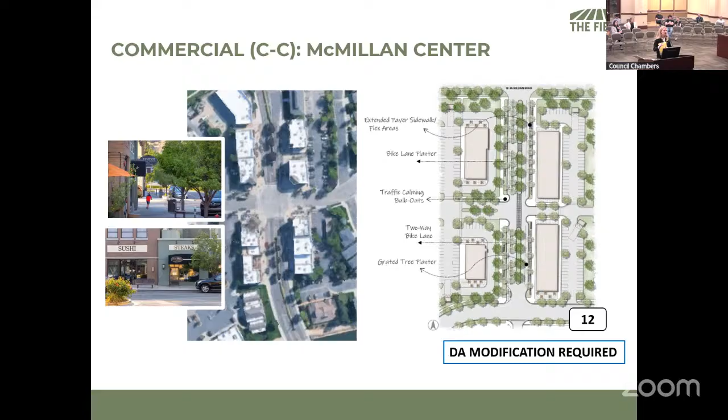I will start, as it's loading, talking about schools. We did talk with West Ada School District last week, and we've spoken with them a couple times. I did want to make one correction to the record. They said they didn't submit a letter, but instead of going to Pleasant View Elementary School, West Ada said they will be going to Ponderosa Elementary School.

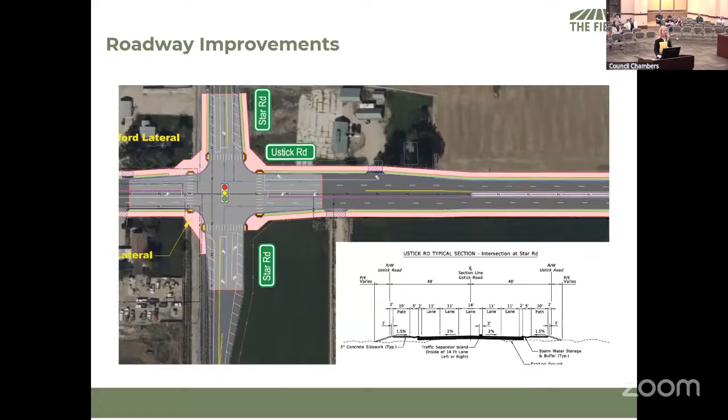So that was part of their recent redistricting proposal. And we understand that schools experience strain. We absolutely understand that. And West Ada, I did want to highlight a couple of things that their CFO and COO highlighted, on the phone with us, and then at their recent Board of Trustees hearing, about House Bill 636. And if this commission isn't already familiar with it, it's a really important piece of legislation that gives school districts a lot of hope for funding future development and maintenance and how schools will develop in the future. So Owyhee High School, as we know, was really built for this area.

Owyhee High School has a lot of students coming in from Star. And the next high school that West Ada School District plans to build is in Star. They already have the property for it. They don't have the funding for it. So House Bill 636 amends the Idaho School District Facilities Fund. It allows eligible state dollars to be used towards lease purchase payments, which are a different mechanism than bonds. They're actually underwritten, kind of like a bond is, but it's just a different mechanism for funding. And this creates a path forward for capital projects without relying solely on voter-approved bonds.

Actually, when I was watching and listening to the school district hearing, the CFO stated, he said maybe, and it's a big maybe, but maybe we'll never have to go back to voters again for bonds to fund these projects, which is just really exciting. So that doesn't change when students might be enrolling from this application in 2028. This district has been able to do some redistricting, which we understand is not ideal, to send kids further than the closest school to them.

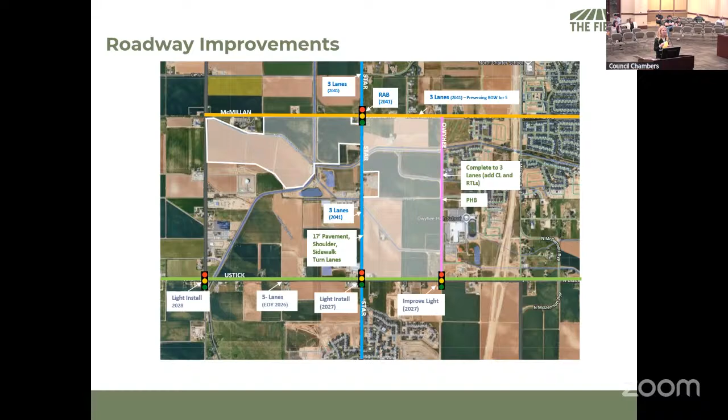I understand, and I live with traffic too. I understand it's frustrating to see development approved ahead of when you think roads should be improved. But again, as part of just this one plat, that's how you fund those improvements — that's how the CIP, ACHD CIP funding, is set up.

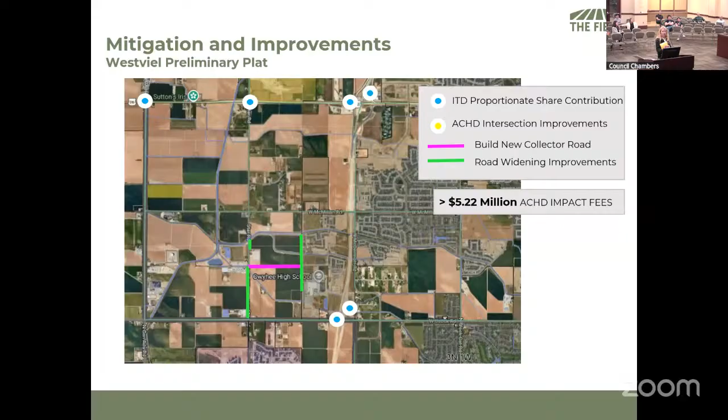ACHD and ITD also analyzed what traffic would be with our full build out. That's not just our traffic — it includes background traffic and all of the other COMPASS modeling for density and projected growth moving into 2040. So that does start to address and trigger those other improvements.

That's when, as our future plans come in — if we come in with the commercial, we will do another traffic impact study, updating it. ACHD will review it and see if any of these highlighted items are triggered at that time.

We had a project recently in Nampa, and I loved one of the commissioners' comments that this is the way traffic impact studies should be done. Again, comprehensive planning means nothing slips through the cracks. If you just look at a preliminary plat and it accounts for 4% of traffic and doesn't trigger mitigation, that 4%, just for our first plat, gets to 12%, and then it triggers the mitigation.

So you don't count development that we do as background traffic, if that makes sense. We end up probably doing more than we would if we came in with individual plats. This is a great way to do traffic planning, and those ACHD CIP funds are just going to continue to increase as we come in with more preliminary plats.

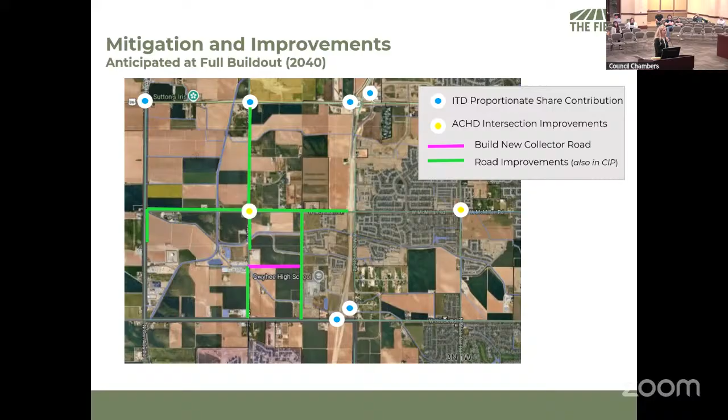You showed in your presentation a timeline, phase by phase, especially with the residential that starts in 2027 for the first home sale. Is this phasing going to include the entire project, or just the residential homes that will be built? Madam Chair and Commissioner, this just includes residential. But if I can guess what you're wondering, somewhere in here, probably sooner than later, once sewer gets a little closer, our next time before you we'll likely be bringing in the Owyhee Commercial Center. That will more than likely develop somewhere in this timeline, and potentially also the McMillan Commercial Center. So we're not going to wait to do the other commercial development only when this ends, it'll be mixed in the middle.

Understood, thank you. And Madam Chair, as a follow-up question, we touched on West Ada a lot throughout the presentations, and you mentioned there is recognition of a strain on the enrollment and capacity of the schools. To the extent that we can, has there been any feedback or comments from teachers? Because West Ada, yes, it's a body that represents the school district, but it's our educators too. I grew up in the California school system in Southern California, and I went to one of the best high schools there up until high school. Our capacity was always full. I went to a high school with 4,000 kids, my graduating class was 1,000 kids, and one of my government classes had over 80 students for one teacher. Have we had any feedback from teachers on this project?